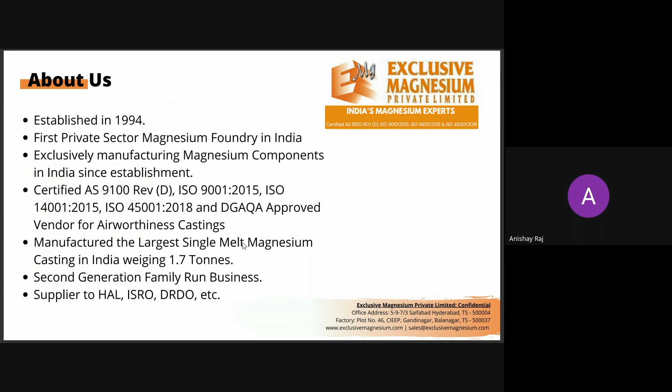So as I mentioned, we are the second generation family run business, and we've been supplying to aerospace and defense for a very, very long time. Recently, about 5-6 years ago, we started into private sector, and we've seen a tremendous growth in the private sector as well. As a company, what we are trying to do is we are trying to capitalize on the power of material science to help innovators build energy efficient machines of the future. And we believe that can happen through lightweight materials. The material that we're betting on is magnesium alloys, metal matrix composites. So that's what we are into, and that's what we believe we can create a dent for.

Just some of our clientele. We work with some of the biggest brands globally, from Mercedes to Ducati, or even drone startups in India. We work with them all. Anybody who's interested in lightweighting and is interested in magnesium, we are interested to talk to you. So no matter how big your project, how small your project, we work with all of them.

Over the past 29 years, we've worked with 6 different countries. We have exported to the US, UK, Germany, Austria, Sweden, Israel, and India is our biggest market right now. And yeah, we worked with over 300 brands, 300 companies over the course of our time.

Majority of our services in India currently are through aerospace, defense, industrial equipment, automotive, drones, consumer electronics as well. Academia is a big part of which is exploring magnesium actively in India. We've seen a huge boom of research happening for magnesium currently.

In terms of our capabilities, we do all kinds of castings. So sand casting, high pressure die casting, gravity casting, centrifugal castings, also machined components, extrusions and forgings. So anything you want to make in magnesium, if we don't have an existing process, we will develop it and make sure that we make it, right? So we don't want to give any excuses of why it cannot be made in magnesium. We'll develop it and make sure that we provide you the components that you need.

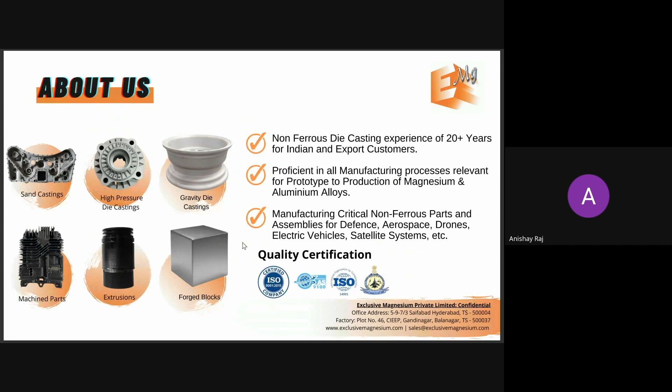All right, so let's get into the main part of the webinar. So we'll start with why lightweighting. A lot of engineers that I've talked to are not even sure why they should focus so aggressively on lightweighting. So I'll tell you a few key reasons that we've observed over our time that has made a huge impact to our clients and how they are thinking about their products, right? So the first key reason is obviously to improve performance and efficiency.

To give you an example, electric vehicles currently in India, there's a huge range anxiety that's linked with consumer behavior, consumer concerns. So, how much range can my electric vehicle give me in a single charge? Do I have to worry about where will I charge during the course of my journey? How long will it take to charge? So they plan their journey and they're very anxious about how many kilometers they can run before they have to recharge, right? So in such kind of environment, and this is not exclusively for electric vehicles, but across industries.

So for a drone startup, you're looking at higher flight time. For a robotics company, you're looking for longer run times. So every industry has their own performance and efficiency standards, and I feel like lightweighting is the key critical place where this can be impacted.

The second is obviously a superior product. Now when you're looking at lightweighting as a primary superiority feature, you can look at the laptop industry currently itself. You can look at the consumer behavior right now, they're looking at anywhere between 1.5 kilos to 2 kg weight of the laptop with the highest functionality. So a lot of laptop companies over the years I've seen that they're looking at high functionality but also lightweight, which makes it the superior product for the whole industry. So building a superior product through lightweighting can also make a huge impact. I'll cover examples for each one of these over the next few slides.

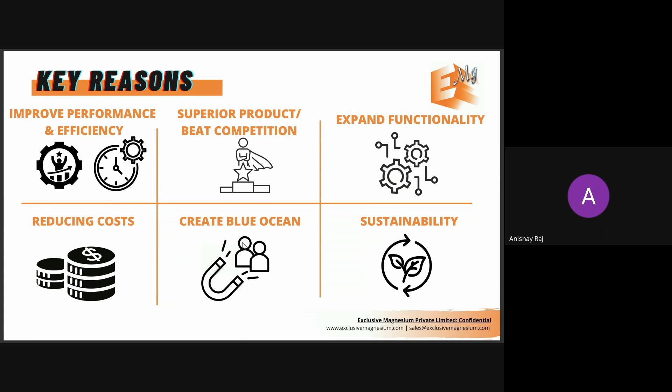I'll give you a few examples of how lightweighting has disrupted real industries. You look at the Boeing 767, a very famous example in lightweighting. They reduced the weight of their overall aircraft by about 20%, which led to 600 liters per hour being saved. Calculate that over 200 days of active duty, maybe 6 hours of flight time per day, and that comes to millions of dollars saved per year, for just one aircraft. The impact of such things over an industry can be dramatic.

Boeing has continued this lightweighting aggressively for their future aircraft. Even Airbus has done this very aggressively for their aircrafts.

One thing I looked at was the best-selling laptops last year. With a quick Google search, I found that Dell Inspiron was the best-selling laptop globally in 2023. You can do this too: look for best-selling laptops and check whether any were made of magnesium alloy. I found that Dell Inspiron was also made with a magnesium alloy body. So lightweighting is a critical factor for consumer behavior.

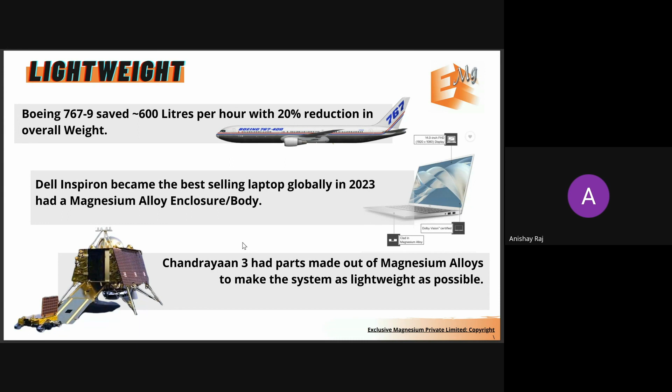Recently, we worked with Chandrayaan 3 as well. We made several components across different categories - the rover, the lander, different components - just to make the product lightweight, so it could be efficient as a whole mission. Lightweighting is being done everywhere.

Three more examples. First, for electric vehicles - I heard the head of GM R&D at the International Magnesium Association conference mention a stat: every 10% reduction in overall vehicle weight led to an improvement of 8% in IC engine vehicles and 14% in electric vehicles. You can see how lightweighting has a significant impact on that industry, and how range anxiety plays into that. Until battery composition is disrupted by some new material apart from lithium ion, lightweighting is the way that will keep giving performance boosts.

The next two examples are the blue oceans we saw. The racket market, which was completely saturated, was reignited by carbon fiber and magnesium alloy rackets. Now it's a $5.18 billion market.

The last one is the European bicycle market, something from one of the podcasts we did recently. An engineer told us that the foldable lightweight bicycle market in Europe is growing at a rate of 8.92% year on year, which is about 132 million per year. A simple product like a bicycle was reinvented with foldability, so it could be carried through metros and up into buildings and houses - that was a big disruption. Things like this are possible with lightweighting as the focus.

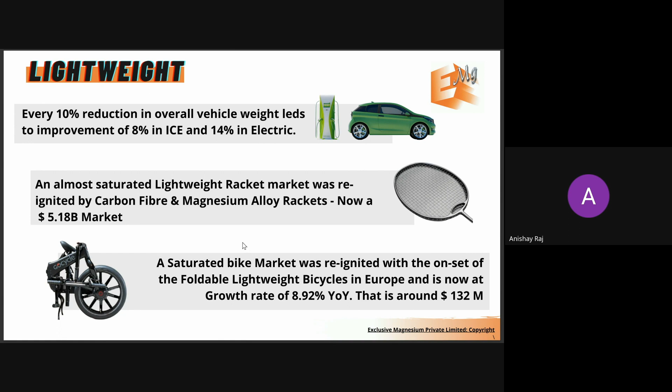I hope this helps you understand how lightweighting is important and is making an impact every day on sales of different products and companies.

In my experience, I've seen there's a trend when it comes to lightweighting: any innovation is first tried globally by space tech and defense. We worked with space tech and defense exclusively for the first 15 years, or 12 years, of our company.

Those were the early adopters always. Then it moved down to airborne systems. Once the airborne systems people started taking it up, motorsports starts taking it up, and sports equipment starts taking it up. Once that is covered, we go down to industrial machinery, because that can lead to a direct impact on the profits that can be generated by a business, right? And then eventually it comes down to mainstream products like automotive and consumer electronics.

And this is my insight. I don't know how accurate you would find this, but this is what I have seen. Every time it happens in the same way for me.

And once it reaches this mass market product like consumer electronics or automotive, so right now a lot of mobile phones are made out of a magnesium chassis or body, right? And in automotive, there's a significantly large amount of components right now which are made with magnesium. At least globally, and in India, with electric vehicles coming in, there's no other place apart from magnesium that they can look at.

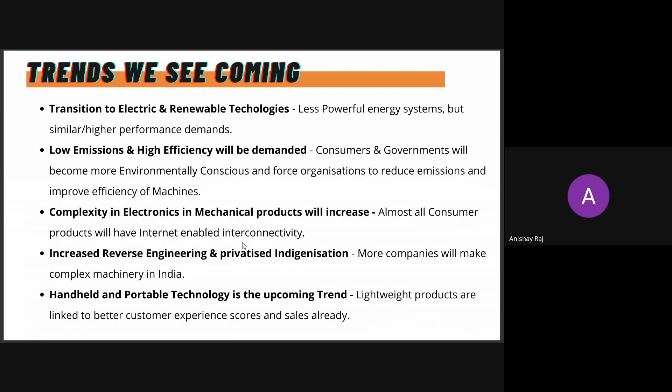The last one is obviously handheld and portable technology. Your mobile phone is the evidence for that. You'll see a lot more of that—everything from binoculars to watches to anything portable, right? Vacuum cleaners, everything will go more and more mobile, more and more compact. And that's where we feel like lightweighting will make the big difference.

So we'll move on to how to lightweight. Removing material so that you can make the product or component lightweight can obviously be done in two ways. One is through innovating with design—you hear topology optimization, lattice structure, honeycomb structure a lot in these things. There are a lot of softwares specifically coming up for lightweighting, like Altair has launched recently, which I was looking at.

And recently I also came across a new design philosophy called TRIZ Innovation. It's a very old philosophy, probably making its entry into India, where they're rethinking how do we think of design. A lot of things can be done to design to help and kind of create that revolutionary design that will impact your product. So that can happen, and I would encourage everyone to do that.

But it's time consuming, given whatever challenges you might have. An easy alternative, another way of achieving the same thing, is a substitute material - switching the traditional material with a new, lighter weight material alternative which meets your mechanical requirements. So we are more inclined towards that.

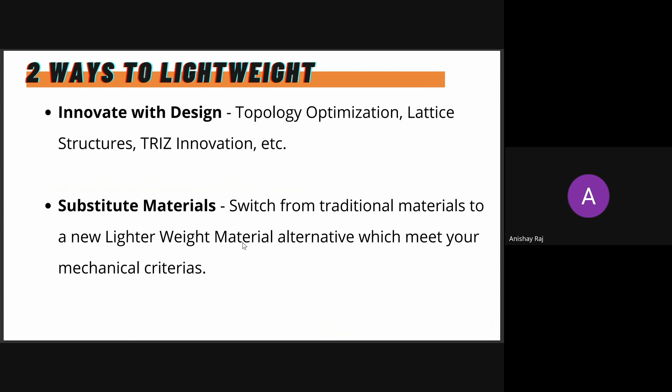We are trying to help companies figure out what kind of lightweight materials can impact their use case and create a drastic difference immediately. When we talk about lightweighting, there are a bunch of materials that are constantly spoken about in India. Obviously polymers are a big thing making big inroads into India - glass fiber, carbon fiber, thermoplastics - these are things that are constantly discussed.

Now, if thermal conductivity and high durability, or having a metal finish, is something that would benefit your product, then you would look at metals. There you're looking at high strength steels, aluminium alloys, titanium, magnesium, and metal matrix composites that are making an entry into India.

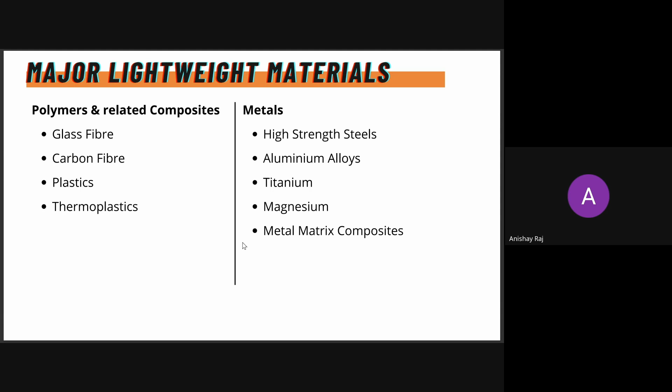Aluminium will always have a significant percentage of this. Steel will always have a significant percentage of this. But I feel magnesium will make a big entry into India, even metal matrix composites. So currently we work with magnesium metal matrix composites, aluminium-based metal matrix composites, and also aluminium alloys when our customers need it. If a magnesium customer needs aluminium, we will do it. So those are the three things we are into.

We made a small chart to help you choose your metal. I've segregated it into different criteria, so let's look at it one by one.

So, cost - aluminium cost cannot be beaten. Obviously it's the lowest cost per unit volume, but magnesium is a comparable close second. Titanium is obviously very costly, but magnesium comes very close to the aluminium price, and that's why it makes it attractive to a lot of design teams we work with, because there are design alterations or product optimizations you can do to bring it almost equivalent to the aluminium price. So it's very appealing as an option.

The second is weight. The lowest density obviously is magnesium - it is the lightest structural metal on the planet, and it is 33% lighter than aluminium. So it has a significant improvement in terms of weight reduction. Second close is obviously aluminium, and after that is titanium. Titanium is 50% heavier than magnesium.

In terms of structural properties, titanium is the strongest. Aluminium has the best modulus of elasticity, but magnesium has the best strength to weight ratio. So if you're looking for your component to be lightweight but also have high strength to weight ratio and durability, magnesium might be a good bet to look at.

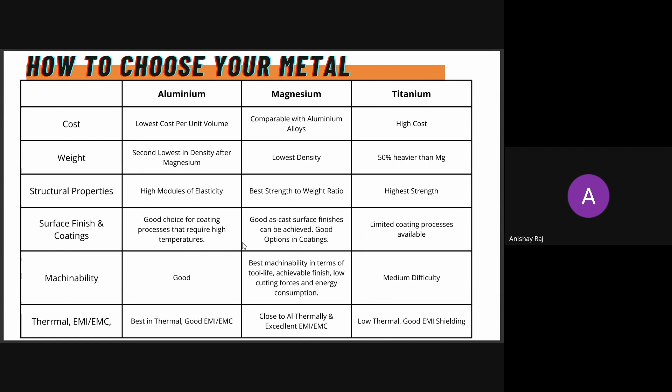So we'll go into a deep dive into magnesium. It's kind of funny because I talk to hundreds of design engineers monthly, and a good chunk of them, when I talk to them for the first time, ask me what magnesium is, because they've never been exposed to it. They've heard of aluminium, steel, plastics, but never magnesium. So I'll start from the basics. Maybe you need it, maybe you don't, but I'll cover it from the beginning.

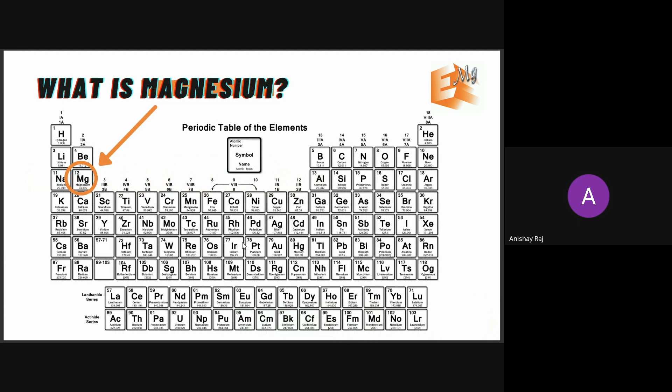This is not a science test, but magnesium is a very light metal on the elements table. It's the eighth most abundant element on Earth's crust. It's rarely found in its pure form, it's found from seawater or through minerals and extracted from there. Extraction happens across the world, majorly in China. I'll cover that as well. It's the third most commonly used structural metal globally.

In India, there's been a slow entry, or a very small entry, for magnesium because of the lack of knowledge about it. There are no experts, there are not a lot of companies who do magnesium in India. We've been in this industry for 29 years, and every company that has started has already shut down, or very few handful are still attempting magnesium right now. We being the oldest. So there hasn't been a lot of education about magnesium. It's also 100% recyclable.

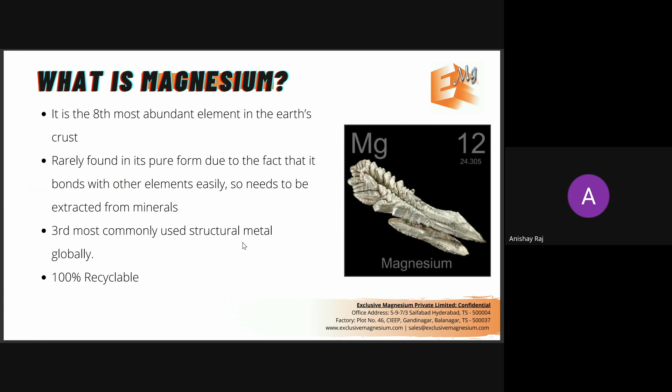So like I was saying, green materials, this would come in terms of supply chain. 90% of all magnesium is extracted in China in mines, and from that, 85% comes from a single district, a northern Mongolia kind of region, Shaanxi province. That's where the majority of magnesium is extracted globally. If you're an aerospace or defense company and have a problem with China, you can also look at raw material from Germany, UK, Israel, much of which is extracted from seawater. So it also has its own purity benefits. That's one more factor.

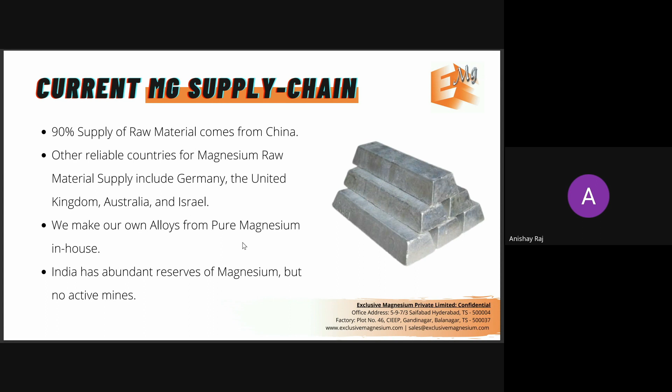Irrespective, there's always an abundance of supply of pure magnesium in India, because magnesium isn't just used by the magnesium alloy industry for making components, but the majority of magnesium that comes into India is used for desulfurization of steel and for aluminium alloying. So there's always an abundance of magnesium available in local markets itself. Though there's abundant reserve of magnesium in India, there are no active mines. There are reserves, but no mines in India. There used to be one about 15 years ago, but it shut down due to Chinese dumping long back. Now we have a couple more people coming in attempting extraction in India.

You want to get into magnesium alloys and understand what the alloy grades are. I'll take you through three of the major series that come up in conversations for any product. The first one, and the most commonly used commercial alloy, is the AZ series. It's nothing complicated: A is aluminium and Z is zinc. So AZ, and then 9 and 1 correspond to the aluminium content, which is 9%, and zinc 1%. That's the composition, and the remaining is all magnesium—about 90% magnesium, 9% aluminium, 1% zinc. This is the most commonly used alloy. Almost every industry, when they start off with magnesium, starts with the AZ series, and it can be used for any manufacturing process, whether casting, forging, extrusion, whatever it might be.

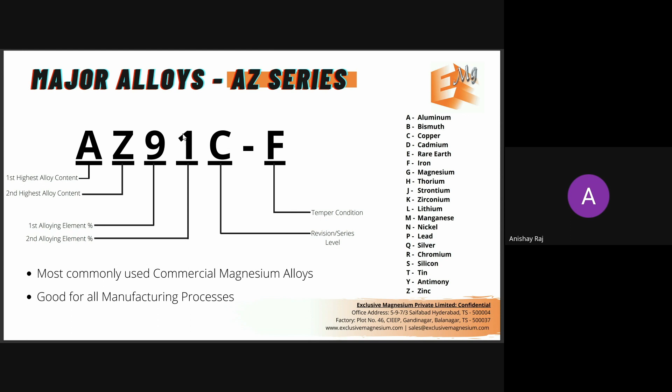There's a variant of the AZ series that can be used, and all the properties of these would be comparable with every aluminium alloy series, like LM4, LM6, LM25, ADC12, or 6061, 7075—you'll find an equivalent of that in magnesium too. So in terms of mechanical properties, that should not be a concern at all. The second major alloy series that we work with, and that you see use cases for in India, is the aluminium manganese series.

M is for manganese. Aluminium is 5-6%, manganese is less than 1%. This is the second alloy series, the AM series. It has very high elongation and damping coefficient.

So it's usually used in impact critical components. For example, all steering wheels in India are made out of this alloy because it's a safety feature. When there's a crash, the driver falls onto the steering wheel. You don't want it to crush the ribs of the driver, but to absorb the shock.

How you think about damping is you take a hammer and start hammering a tree trunk. You'll observe that majority of the shock is absorbed by the tree trunk and not reflected back to the hammer. That's exactly how magnesium is. It has very high damping, it will absorb the shock and not react back. It's kind of like shock absorption capability.

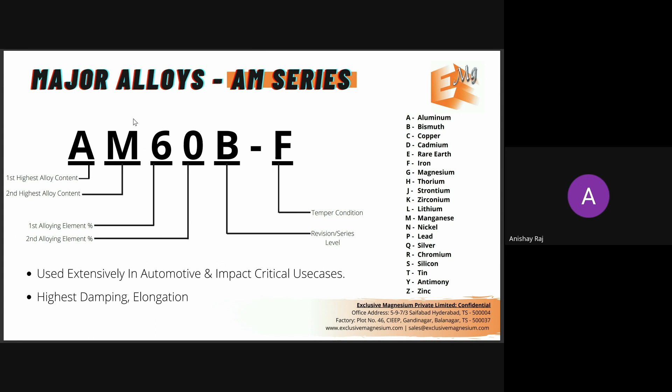So the AM series has very good shock absorption. We are now making cricket helmets out of this. A lot of car cross beams are being made out of this. A lot of crash critical or impact critical components are being made out of this. That's the second major alloy series that is in play in India.

And the third series is the rare earth series. This is a more expensive alloy since you're using rare earth, and this isn't complicated, this is just one of them. Zinc, and E stands for rare earth. So that's 4% zinc and 1% rare earth.

What these rare earth alloys do is they're used for elevated temperature use cases, where working temperatures are around 250 to 350 degrees, and you still want the alloy to maintain strength and not lose it through creep. That's where these rare earth series are applied.

We've seen people use these kind of alloys for automotive engine parts. We've seen them used for helicopter gearboxes, fighter jets, different kind of use cases. Airborne systems use this very regularly. Even defense systems use this very regularly. So that is the third major series.

Now, one thing you should understand is there's a range of these, apart from the ones mentioned here, which is just what I could mention, but there's a lot more. With just a change in composition, magnesium starts giving a completely new property.

For example, if you want very high thermal conductivity close to aluminium, you would use something like a ZM series, zinc and manganese, and that would bring thermal conductivity to as high as 125. Aluminium has something around 150. This 125 is significantly high for any kind of electronics or mechanical use case in general, or even for heat sinks, this is more than sufficient.

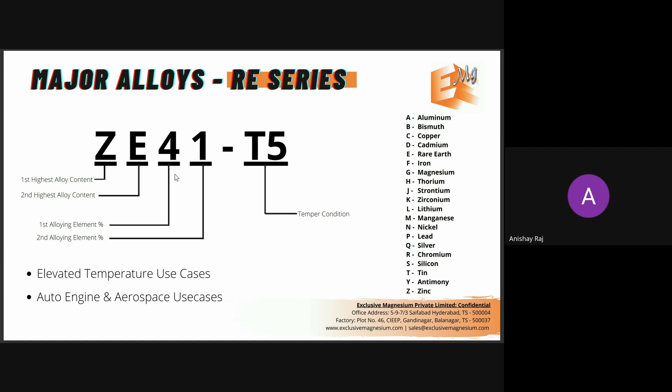So we'll go through the advantages. Every customer that comes to us, their primary property is always lightweighting, but there's always a secondary benefit they're looking at. Some of the other benefits I mentioned are high shock and vibration damping.

You're trying to reduce damage to internal electronics in a consumer electronic product like a laptop, a rugged laptop, a rugged tablet, or a mobile phone, or even a drone. They crash, and you don't want the internal electronics to get badly affected, so you want high damping. Even for audio components where you want to absorb unnecessary vibrations, or in industrial equipment where you want to reduce vibrations to improve wear and tear, high damping is another factor.

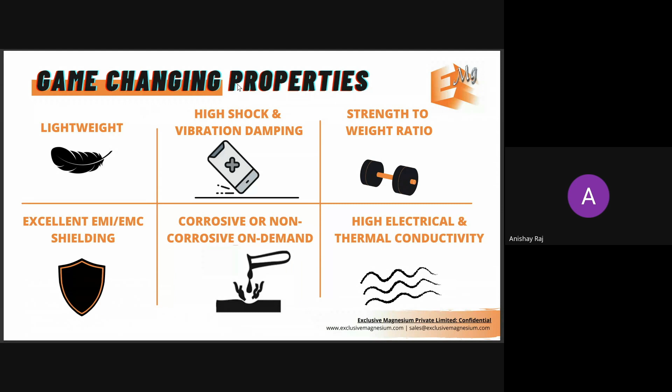It obviously has the best strength to weight ratio. It has excellent EMI EMC shielding. A unique property I mentioned earlier is being corrosive and non-corrosive on demand depending on chemical composition, so corrosive in biomedical and oil industry for fracking and similar products, or absolutely non-corrosive for any consumer-related product. Both can be achieved through magnesium, and it also has high electrical and thermal conductivity like we spoke about.

So converting that into an understandable way, a lot of our customers are trying to reduce the weight of their metal parts by 33%. That's something that is easily achievable.

Reduce vibration and noise, and reduce wear and tear. They're trying to lower the effort to overcome rotational inertia. This would be in textile machinery, tire building machines, wheel rims, these kind of things.

The next one is to improve mobility and runtime. This is for products like robotics, drones, or even electric vehicles. They're trying to increase the performance of their product.

The fifth is to reduce human effort. So if you're making sports equipment, you want the player to wear this safety equipment, but not find it very heavy. You want it to be ergonomic, you want it to be comfortable for long-term use, or even something like hand drills made for power tools. If it's a handheld power tool, you want the worker in a work setting to be able to use it for the longest period without fatiguing or impacting their strength bearing. They're trying to make the person use it for a longer period of time, and that can be done through magnesium.

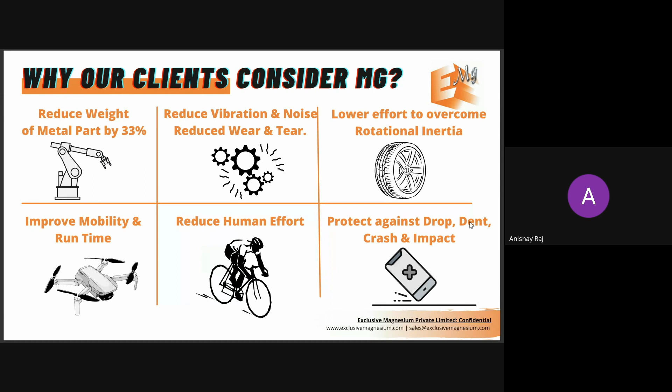The last one I already mentioned, how drop, dent, crash and impact can be prevented. So rugged laptops are a major use case for magnesium for that reason.

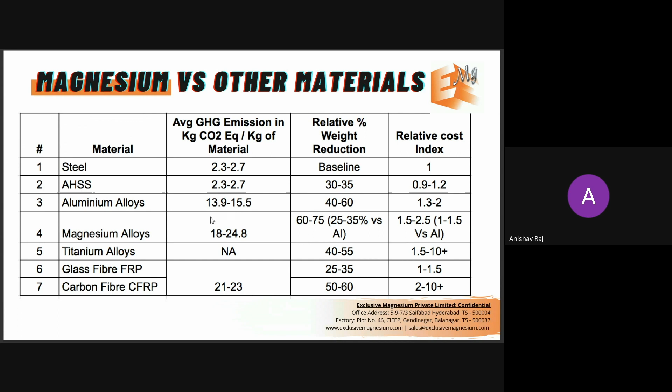For those interested in emissions, as you can see from this chart from the International Lightweighting Journal, they use steel as the baseline and compared other lightweighting materials. They found that with magnesium you get the maximum amount of weight saving in comparison to steel. It's slightly more expensive, but that also talks about how it's impacting your product—that's one other factor. In terms of emission reduction also, the highest reduction is possible through magnesium.

So let's look at places where aluminium is the biggest competitor to magnesium in India. If you look at where aluminium is better, it's obviously thermal conductivity and cost. That's where aluminium is number one.

Whereas magnesium is best in damping coefficient, density, least amount of draft, and ability to cast thin walls. We can cast walls as thin as 0.6 mm without a sweat, like we can do 0.8 mm naturally, easily in die casting. You can machine magnesium to very thin wall thicknesses, which is an additional weight saving beyond what aluminium designs can achieve.

Shielding, machinability, recyclability, die life—I'll cover this a little later. So a lot of benefits in that sense.

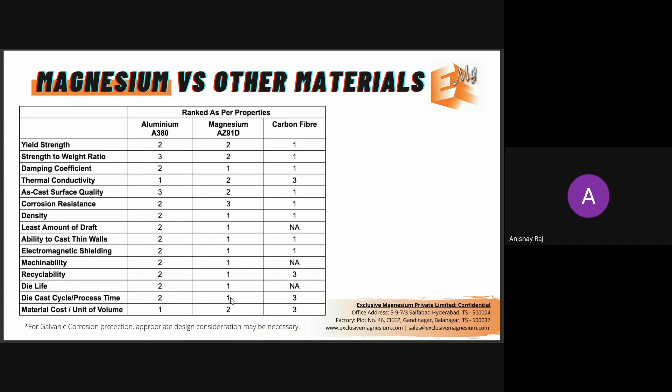I'll take you through the three major benefits. Lightweighting, like we already spoke—here are a few examples. It's 33% lighter than aluminium, 75% lighter than steel, and 50% lighter than titanium. Even the strength difference with steel and titanium that magnesium has can be compensated with a slight increase in thickness of the wall. Like I was mentioning, the cricket helmet, we had to increase the wall thickness, the diameter of the grill from 2 mm to 3 mm, and that was sufficient to maintain the strength.

So it's not a significant increase, and with that thickness increase, you can still achieve a significant weight saving. In the cricket helmet case, we saved about 50% lighter than what was possible with steel, even after the thickness increase.

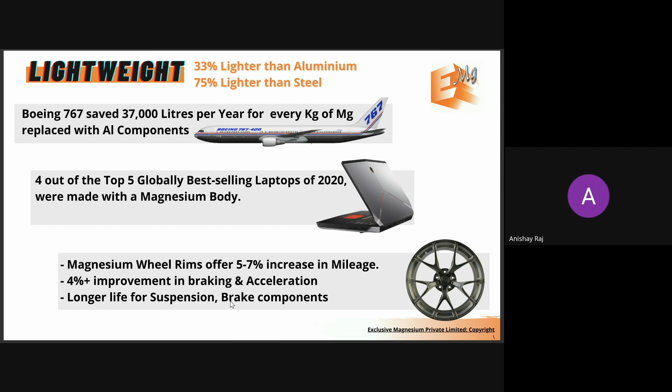In terms of mileage, just by replacing an aluminium wheel rim with a magnesium wheel rim, you'll get a 5 to 7% increase in mileage. You get a 4% improvement in braking and acceleration, and longer life of suspensions and brake components. That's one. The second major benefit is damping.

Depending on the alloy of magnesium, you get anywhere between 30 to 100 times better damping coefficient than aluminium, and that is the reason why it is used. Vibration testing equipment itself is made out of magnesium, right? A lot of components that we make regularly are for the vibration testing industry. Every Indian vibration testing industry makes it out of magnesium, and internationally as well.

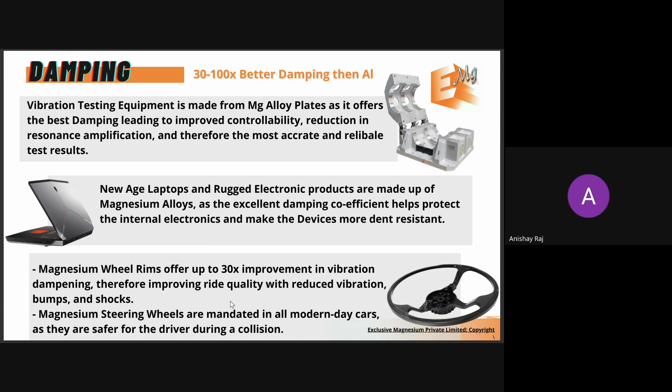In the laptop industry, protecting internal electronics is critical, so there also you see a lot of use cases. And the steering wheel example I already shared, how it's a safety related component with damping as the priority.

The third is EMI and EMC shielding. It has the best wall thickness to shielding ratio, so it's used extensively in medical devices because there's a very high standard for shielding in that industry. It's also used very frequently in drones and in defense and aerospace products, because shielding is very important in those sectors.

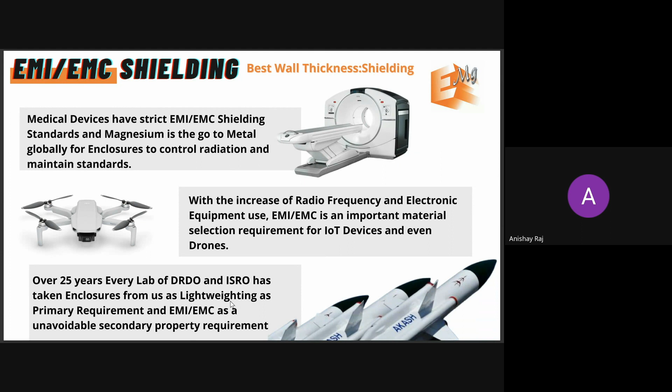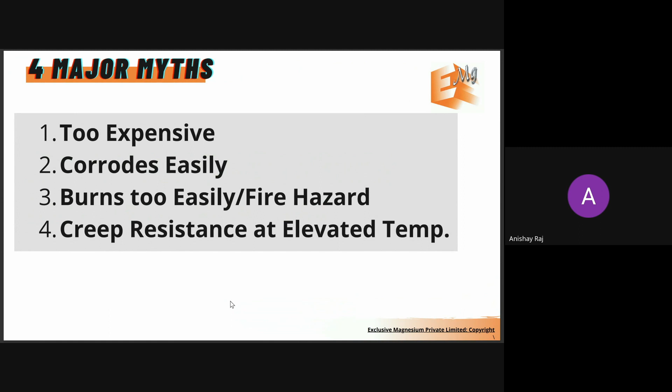Now this is the important section. There are a lot of myths that we come across when people ask why they're not using magnesium. The 4 reasons people will tell me are: it's too expensive, it corrodes easily, it burns too easily or is a fire hazard, and creep resistance at elevated temperature. The creep resistance issue I already addressed with the rare earth series - a lot of people are not aware there's a series of magnesium specifically catering to creep resistance, so I won't cover that. I'll cover the top 3.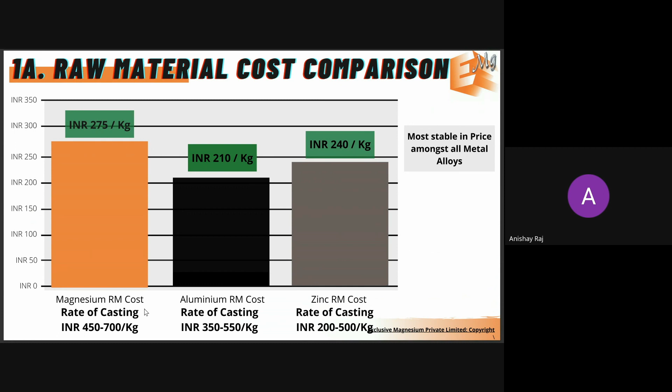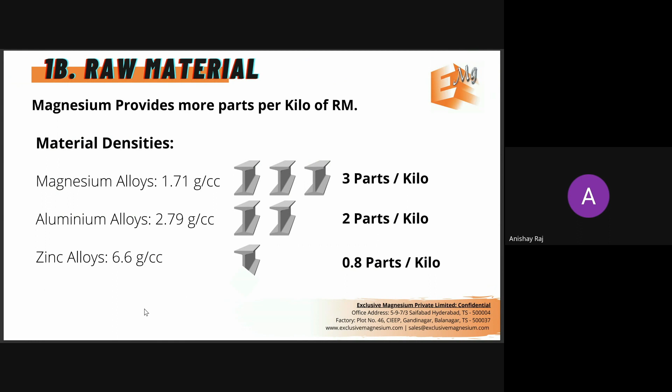The second point you have to remember is that because of the lower density, if 1 kg of magnesium gives you 3 components, aluminium can only give you 2, and even lesser with zinc. So there's saving there too, in terms of the amount of raw material used.

The third factor when it comes to cost is the die cost. When you look at die casting, an average aluminium die would give you somewhere around 1 lakh shots, whereas because of the low affinity of magnesium to steel, you'll get about double that at minimum with magnesium. So if the die was costing about 10 lakh, you're directly saving 10 lakh rupees just on the die, because you can run it for much longer. If it's a serial production component getting 4 lakh units, you can get up to as high as 4 lakh units in a single die if it's continuously running. So there's a lot of saving there that accumulates over time, and it will end up becoming cheaper almost in comparison to aluminium if you consider these costings.

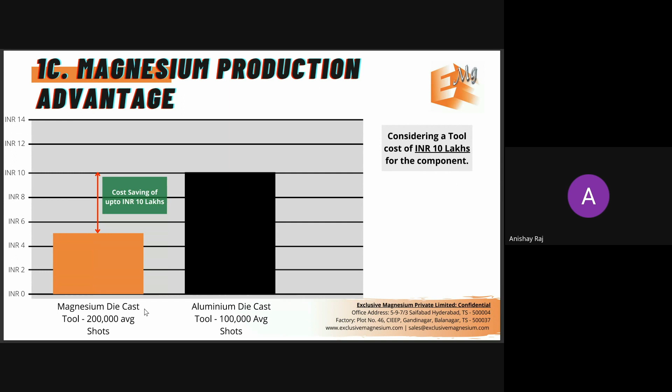The third benefit is you can also reduce weight due to the ability to cast thin walls or maintain stiffness at thin wall thickness - this is weight at equal stiffness. Some features of your component don't require load-bearing strength, they just require stiffness. In those sections, we encourage our customers to reduce wall thickness, because magnesium can be cast in thin walls - so if it was about 2mm, you can reduce it to 1mm. That is possible with magnesium. Additionally, you can maintain stiffness while reducing the weight of the component, which helps save metal and also save cost.

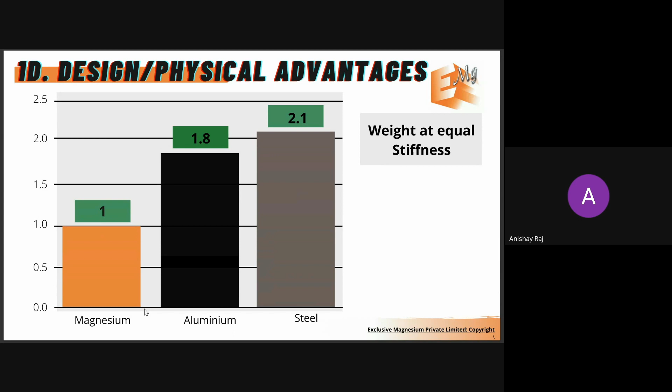So these are the 4 things I wanted to cover in terms of costing. The second myth, which is about corrosion.

If you look at magnesium, it was corrosive if you spoke about 20-30 years ago. Now, with the latest revisions of alloys, it has become almost similar to aluminium in anti-corrosion properties, with AZ91D. Here you can see the revision of the alloy, AZ91. The letter stands for the revision - we are at revision D, and every year the industry refines it further to make it less corrosive. This itself has significantly improved the standard for corrosion.

Additionally, if you're taking a component from me, I will give it to you with coating, and coatings in magnesium are so good that some of them guarantee 99 years anti-corrosion guarantees. There's a company called Indestructible Paints that offers something like that, for aerospace and defense use cases. There are very good service life corrosion resistance options available - for marine environments, for highly corrosive environments, we have something. So that should not be a concern.

One thing you should probably consider is galvanic corrosion. You have to design for that.

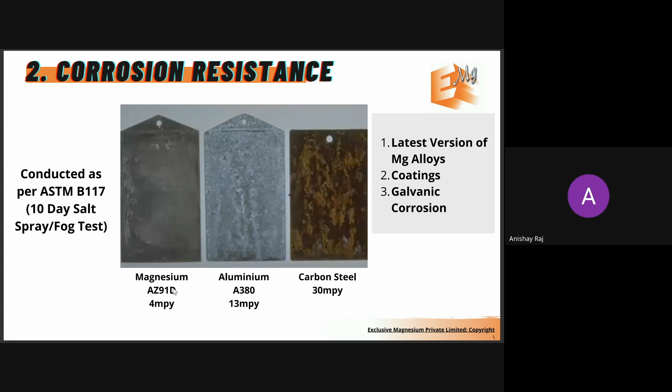The biggest misconception of them all, and I'm sure some of you also had this, is that you feel magnesium catches fire. So there are two things. This is also true - magnesium is very dangerous in powder form, it catches fire very easily, and it's very difficult to put out magnesium powder fires. That's why it's used in the cracker industry for sparklers, and different kinds of crackers use magnesium powders.

The second is the molten state. When molten magnesium comes in contact with moisture, it has the capability to explode. That's why you don't see a lot of companies in India working with magnesium. We were trained 20 plus years ago by a global player on magnesium safety - that's the reason why we still survive, and we're able to do defense and aerospace quality business. Molten magnesium is very dangerous, and that's why not a lot of companies start doing that. You cannot treat it like aluminium, just melt it and pour it - that's not how magnesium can be done.

But in finished format, you have day-to-day components you come across - from aircrafts to wheel rims in cars, your steering wheel is probably made out of magnesium - and you don't see them catch fire. Even with a wheel rim, if it drags along the road with a lot of abrasion, it still will not catch fire, because magnesium alloys in their component form are flame retardant. So this is not true at all, and this is probably the biggest misconception a lot of people have.

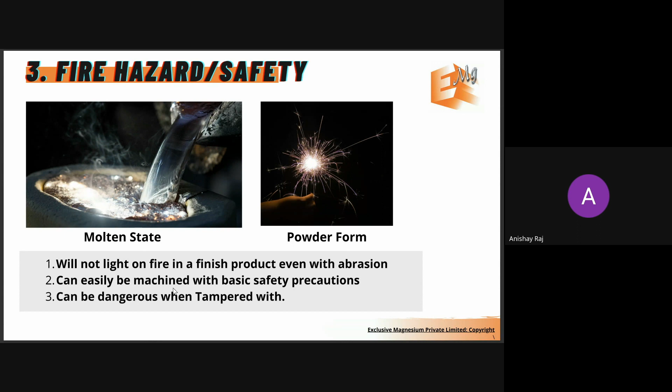The only factor you should consider for your specific product is whether you see a trend of tampering. For example, in the UK there's a lot of modification business with car engines. When Volkswagen was making engines out of magnesium, there was a trend of local mechanics trying to weld things into magnesium without knowing it was magnesium - they would try to weld aluminium or something else, and that would catch fire. So those kinds of cultural and trend factors have to be evaluated by yourself, whether this plays into your industry and product, and then you can decide.

We'll move on to the manufacturing possibilities. I'll cover what is possible and what is not possible with magnesium. First, in terms of raw material, a lot of our customers want to do their own prototyping and their own production. So they take cast blocks, rolled plates, forged blocks, and billets from us, and we provide that to them, and they do their production themselves.

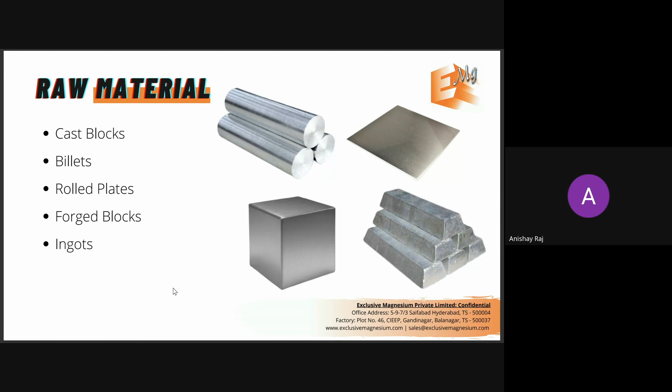I'm sure some of you will want to do your own prototyping, or if you have CNC machining centers, we can do it too. But if you want to do it yourself, we can give you raw material to get started. The next thing is all the available magnesium processes.

We have all kinds of casting capability - high pressure die casting, sand casting, gravity casting, centrifugal casting, machine components, extrusions, forgings, roll plates, sheet bending. If there's a process currently not available with us but you want a component made that way, we will develop it for you. We are committed to being the one-stop solution for all magnesium component needs in India.

Last year we developed cold drawing - a couple of years ago actually - and this year we'll be developing closed die forging, which will play into the wheel rim business in India. I'll take you through each one of these.

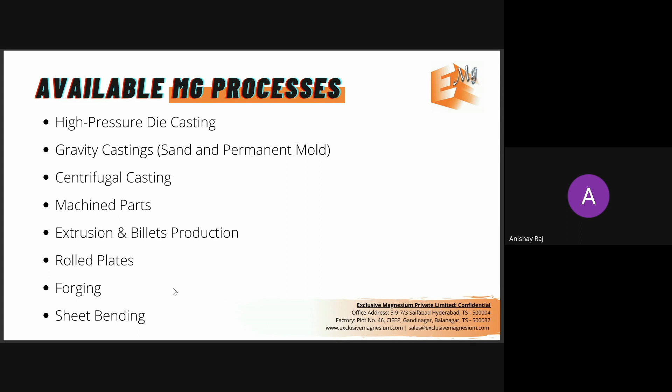In terms of extrusions, it's done the same way aluminium is extruded, through a tungsten carbide die, but the process is slightly different - temperatures are different, stress and strain is different. We make rods for Swiss type lathe components, and also a lot of profiles.

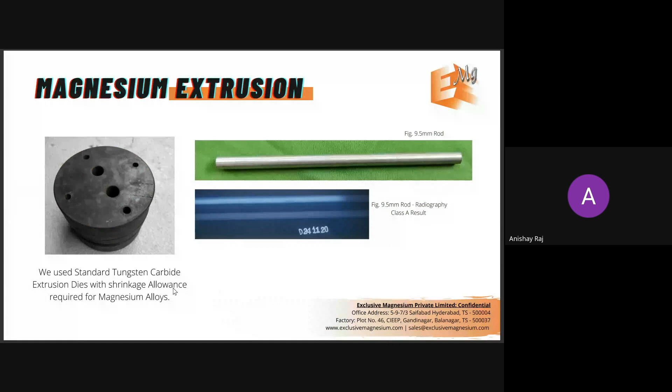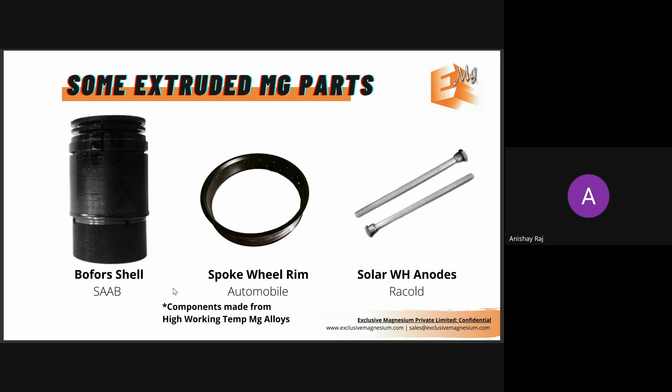Here are a few examples - solar water heater anodes, or spoke wheel rims, which is extruded and then bent and rolled. This was for the electric motorcycle market. And the Bofors shell was actually extruded as a pipe and then machined later. These are just a few examples of our extruded products.

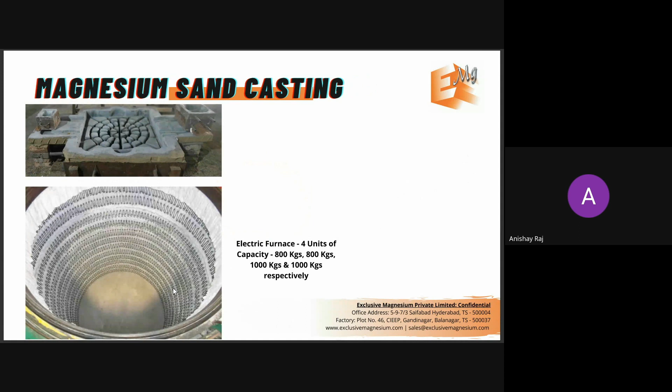This is completely hollow on the inside, with a 2 mm piping going from within the wall of the casting itself. We've done a lot of components like this which are extremely complex, and we've been successful. In terms of sand casting, we would consider ourselves one of the best in the world, at least in magnesium sand casting.

No size is a limit for us - we've done a 1.7 ton casting with an actual melt of 2.7 tons. And any kind of complex design with cores, metal cores or sand cores, we can do it all.

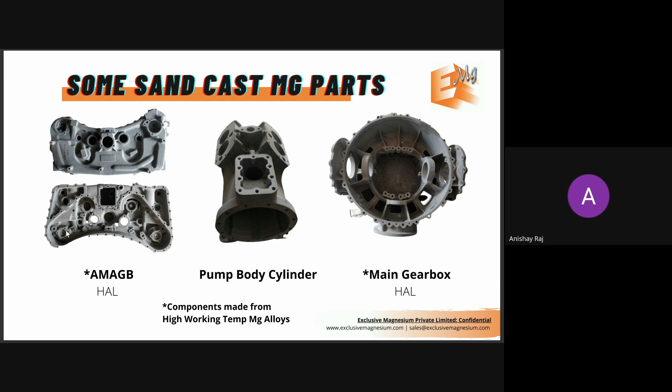Gravity die casting is similar - we use MS and cast iron gravity dies with appropriate shrinkage allowances. Recently we did a racing wheel rim for the international market, and as you can see, it has a great finish right out of the die.

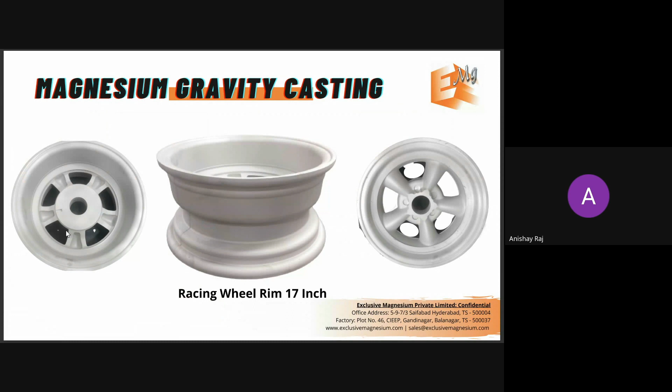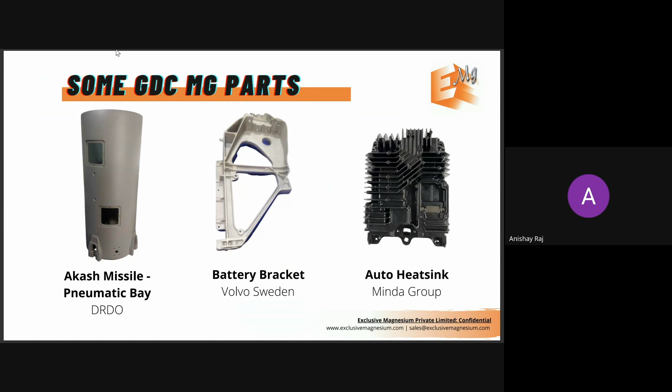This is right out of the die, and these are some other components we've done through GDC. The Akash Missile is our continuous order, for the pneumatic bay of the Akash missile.

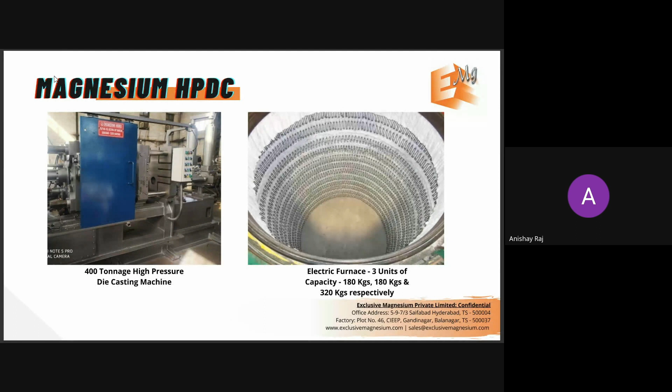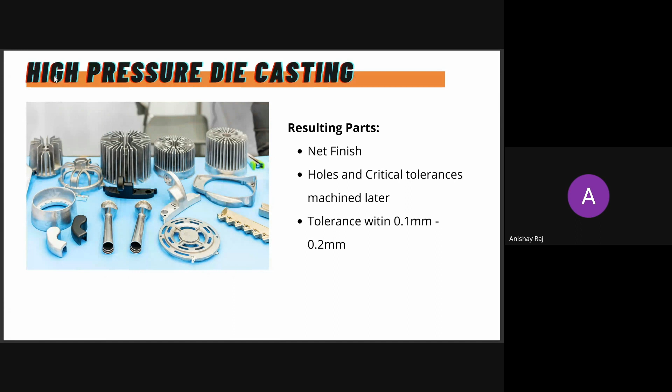High pressure die casting, if you're not aware, is a process where we have capability from 60 tonnage to 1200 tonnage - any size component within that range, we can support you. The end product has a great net finish. Holes and critical tolerances have to be done later, and the tolerances will be within 0.1 to 0.2 mm. Here are just a few examples of our die casted products.

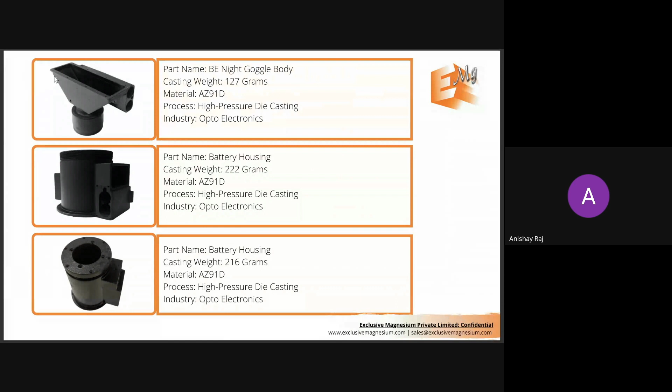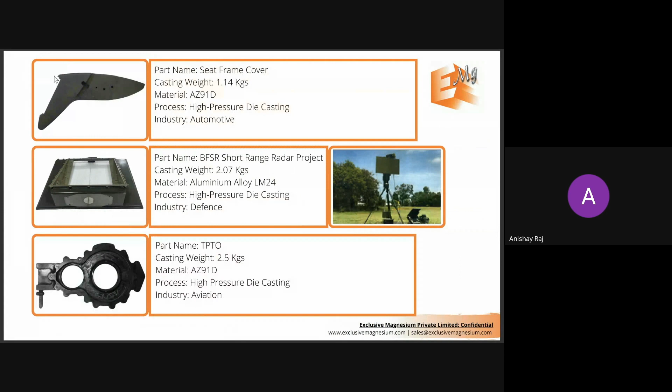We've done everything from optoelectronics, battery housings, consumer electronics, mobile phones, automotive, defense, and aerospace die castings for all of these. So that's a big chunk of our revenue will always come from die casting.

The last part is about design capability. If you're not already using magnesium, we can help you redesign your component in magnesium. If you're currently using steel, aluminum, or plastics, we can help you transition. If you're using aluminum, there isn't a lot of design change needed because the properties are very similar - you can almost use the same die for magnesium.

The next part is about weight optimization. If you have a component that you want to lightweight, you can send it to us and we can help you with the weight optimization of that component.

The third is very basic designs like battery enclosures and simple products we can design in-house as well. So we have that capability, and any kind of analysis, FE analysis, we can do. So these are the four ways that we can support in terms of design.

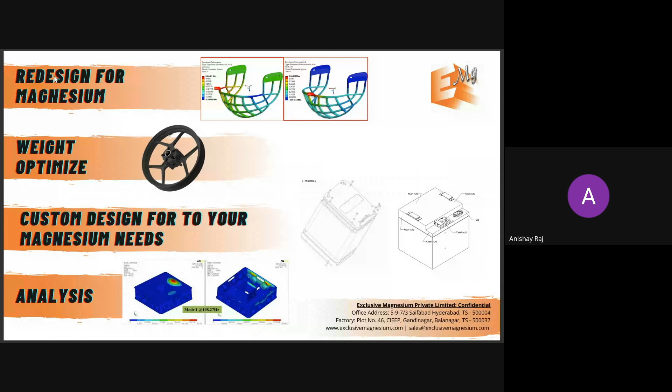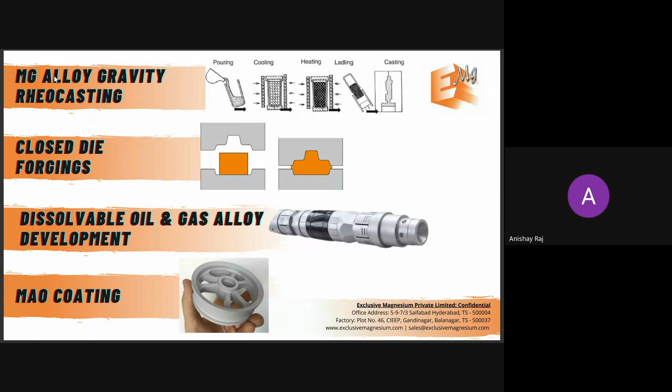Currently, in terms of our ongoing R&D, we are working on a rare technology called gravity rheocasting. There we also mentioned closed die forgings we are working on. We are working on a dissolvable fracking tool. We're also working on multiple types of new coatings for magnesium. We're constantly in R&D, figuring out how to expand the use case for magnesium in India.